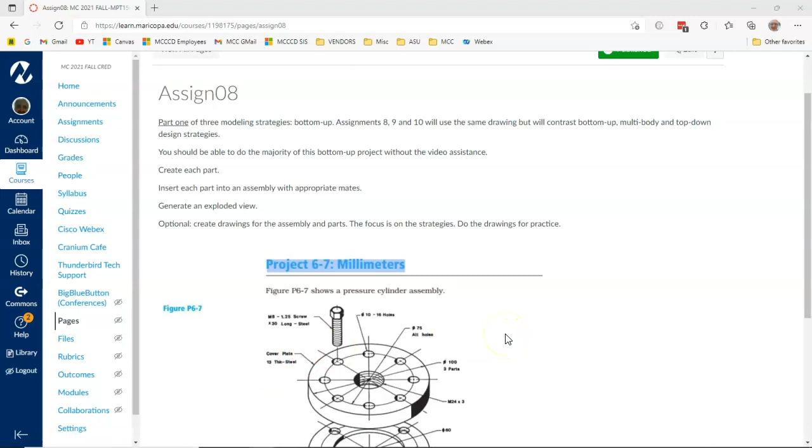Assignment 8 is going to be part 1 of 3 modeling strategies.

We've been doing bottom-up modeling for the first part of the semester, and it consists of creating each part individually, bringing them into assembly, applying the mates, and then creating the exploded view and the drawing. So for this project, we'll be creating each part, inserting the part into the assembly, and then generating an exploded view. The drawings will be optional, but these three are pretty much our standard processes.

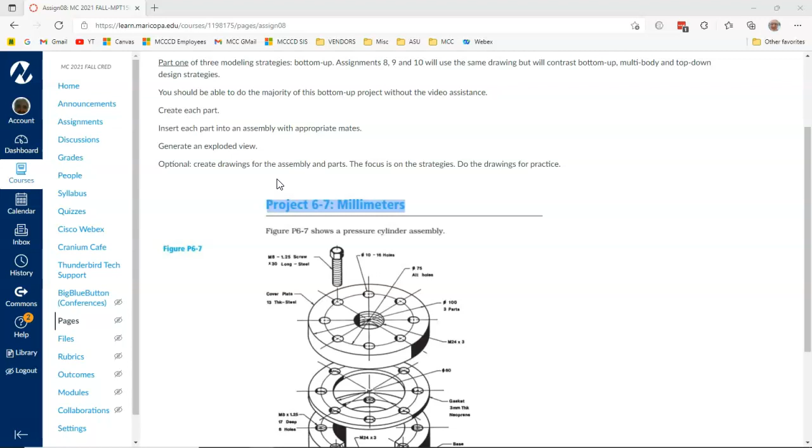So looking at the parts, we can generate a revolve. This will probably be just a regular extrude, and a regular extrude would look at doing the hole wizard for M24, assuming that they're both M24, and looks like they've put in the by 3 this time, so they've given us a pitch, and then the bolts have their designations on them.

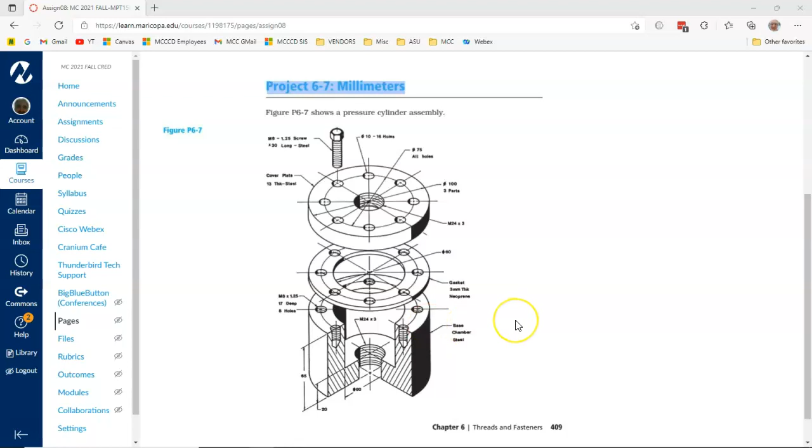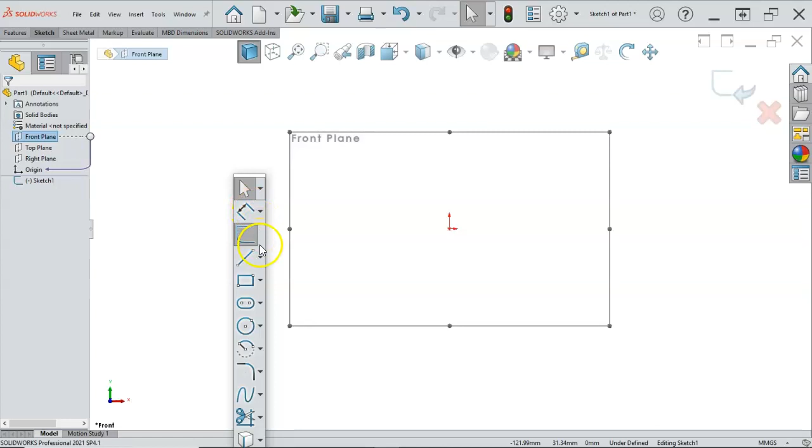So let's go ahead and get started with some revolves. We're still in metric. We're going to build the base. So front plane, sketch, and if we go into the S key, we can do the center line, infinite length, and vertical. I still find it just as easy to hit escape and then L on the keyboard.

Since we're going to generate the M24 with the hole wizard, we'll close this off. If I was going to have that be part of this revolve, I would start off out in space somewhere and leave the hole away from the center line. So our diameter is, as soon as I find it, see the 100 millimeters for the outside, so about 40 to start.

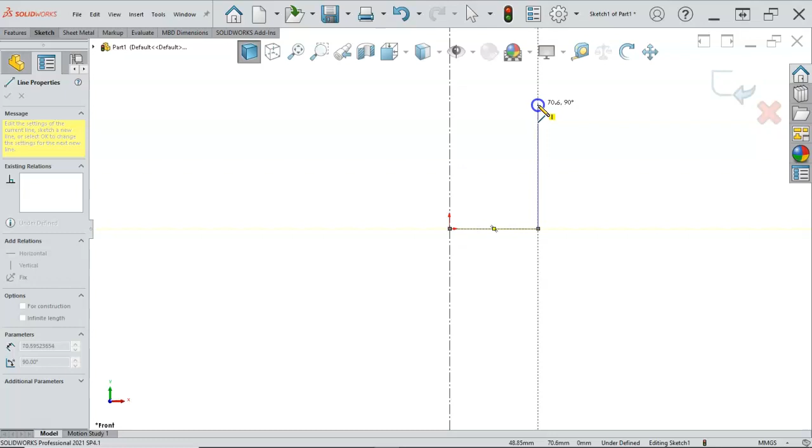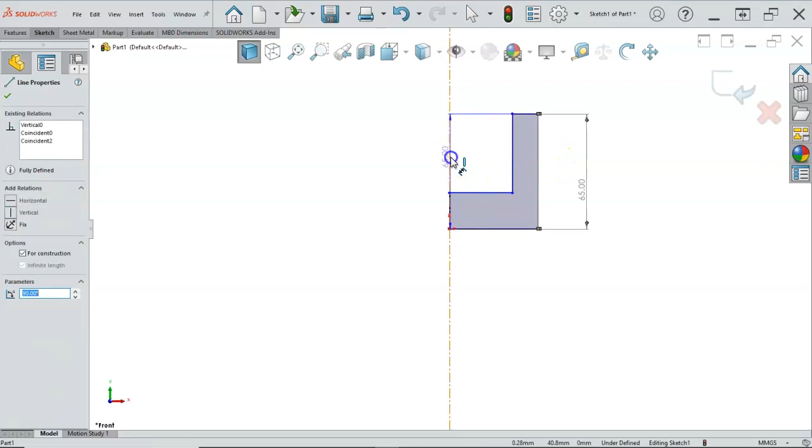Overall height is 65, so we can get close. The wall thickness, back down and around, and close it off. We go into our dimensions, so we have the 65. The diameters then, once I pick the center line, it goes into the diametral, so radial, diametral, radial, diametral. If you pick your object line, you're not going to get the diametral.

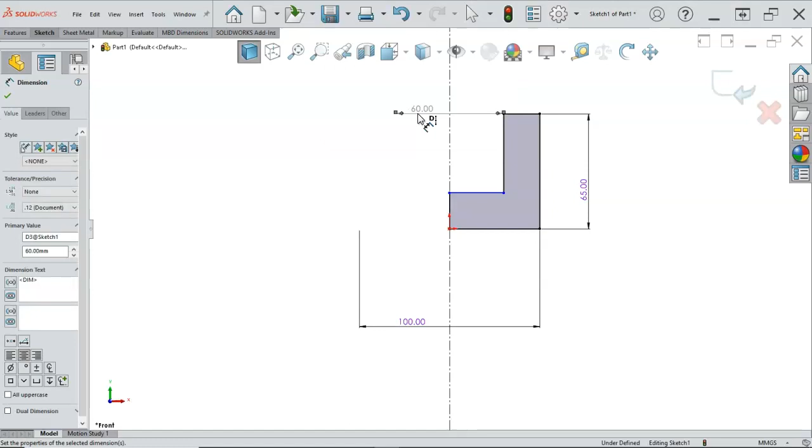So you can put in the radial and keep going with it if you need to. The inside diameter is 60. Since it's in that diametral mode, it will jump into it. And then our thickness is 20 on the bottom. That looks pretty good. We got our geometry in there. So features, revolve, and go ahead and accept.

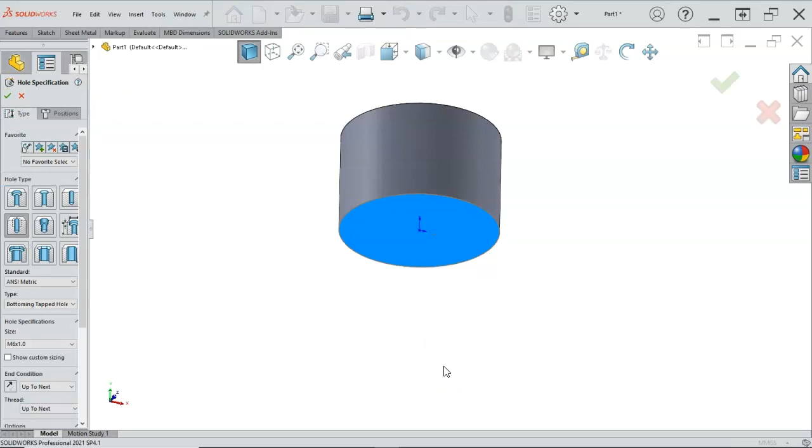And then we have the hole pattern for the M8s and the through hole for the M24. So let's start with that. S key, hole wizard. And if I go to Control 6, or normal to the bottom, that will rotate it around.

ANSI metric. Not really worried about the bottoming tap or tapped hole, haven't seen any major difference anyway. I think more of the blind holes that we'd be concerned with. M24 by 3 on our callout.

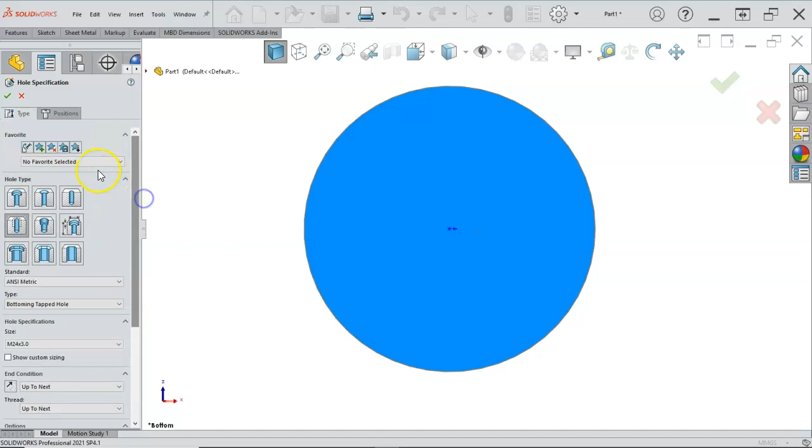So let's see, that was on the top and also in the bottom. So up to next, and if we do a thread class, this is going to the ANSI, but a standard metric would be the G values. So 5 or 6 G in our designation. And then position, we'll put it at the origin. Go ahead and accept. Control 7, go up to the top.

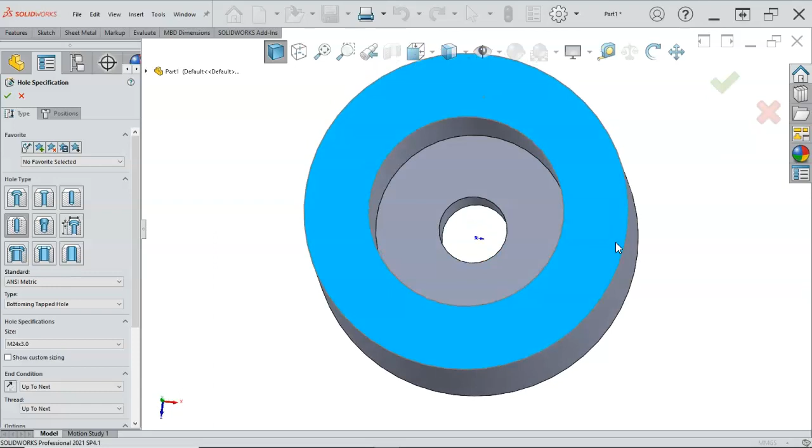And S key again, we're going to do the M8s. I'm set not to rotate to sketch, or it's not doing it with the hole wizard anyway. So I'm hitting Control 5 to generate. And we're looking for an M8 by 1.25.

And our depth will be 17 millimeters deep, so that sounds pretty good. So we need to switch to a blind end condition, and depth of 17. And then we have to decide if we're going to the drill tip or to the shoulder of the drill. So a millimeter is not really that much.

Usually, as a machinist, I'm going to look at that and say I have plenty of material there. I'm going to drill it at least a millimeter or two deeper. So the length of the thread on the bolt they've chosen is 30 millimeters. It has to go through 13, and 3 is 16, and another 16 would put it right at having about 2 millimeters of clearance from the bottom anyway. 17 millimeters being kind of an oddball anyway.

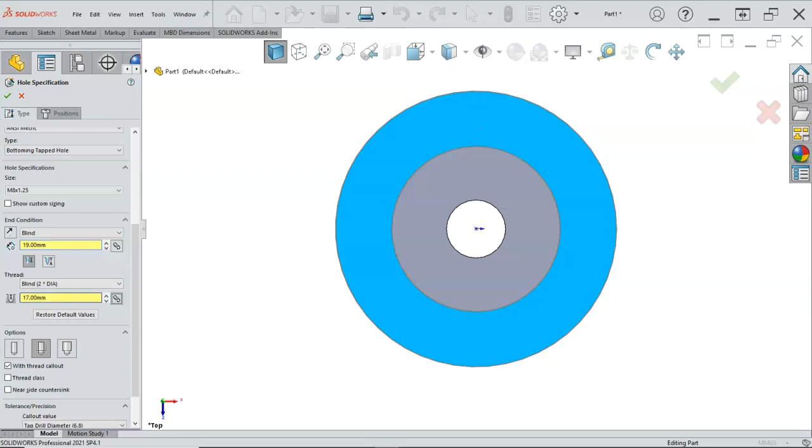If we were going to go to actual thread depth, it just depends on the hole callout, as the hole callout really defines this quite a bit better. So 19 millimeters, 17 millimeters for the thread engagement. Make sure we have plenty.

And positions, we'll rough locate the first. We haven't really had a chance to do too much with our sketch patterns, and for that matter the feature patterns, so we'll take a look at both of those.

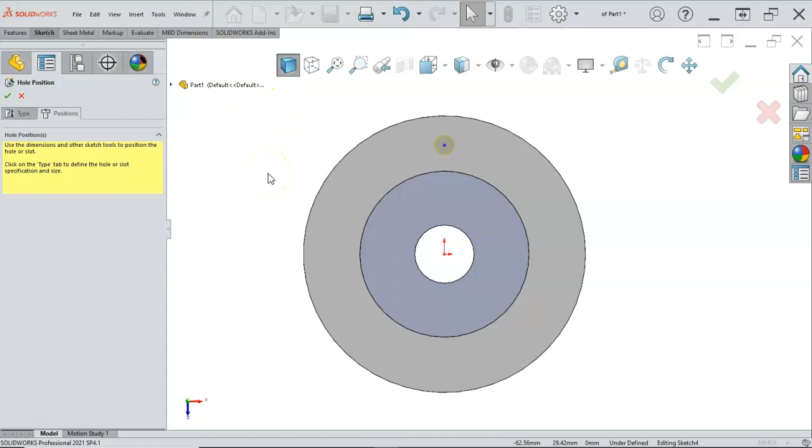The first then is I want a construction circle. So if I do the S key, or in this case the sketch entities, and go to circle, there's no circular center line or anything, so we draw the circle and set it for construction. We'll put our base circle diameter on of 75 millimeters.

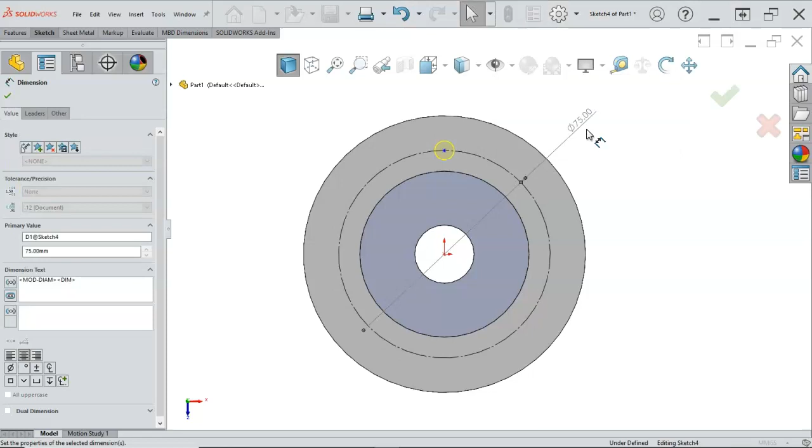I'm going to make sure that I have the orientation set by selecting and control-selecting the vertical to the origin.

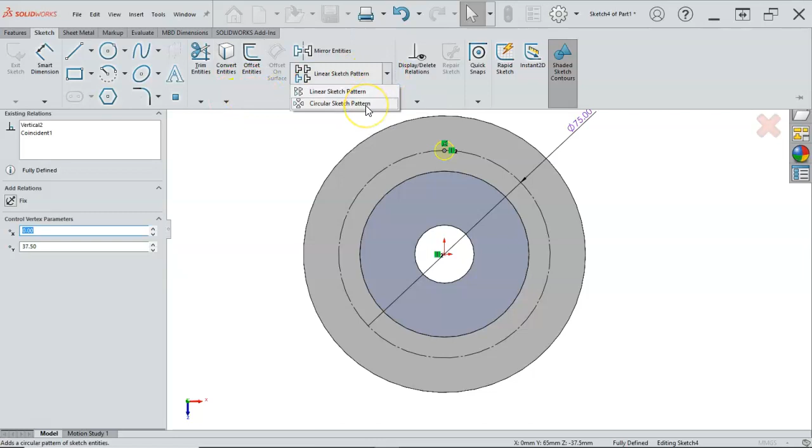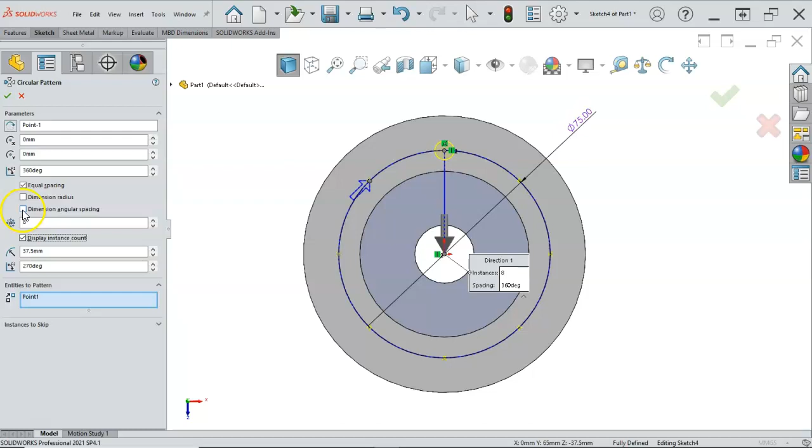When I pick this point and go up to the sketch and pick the linear sketch pattern pull down, circular sketch pattern, we're going to have a total of 7, 8 — so we're going to have 8 equally spaced. We don't need to dimension the radius, but could possibly do the angular spacing. In this case, it's probably easier just to go ahead and accept it.

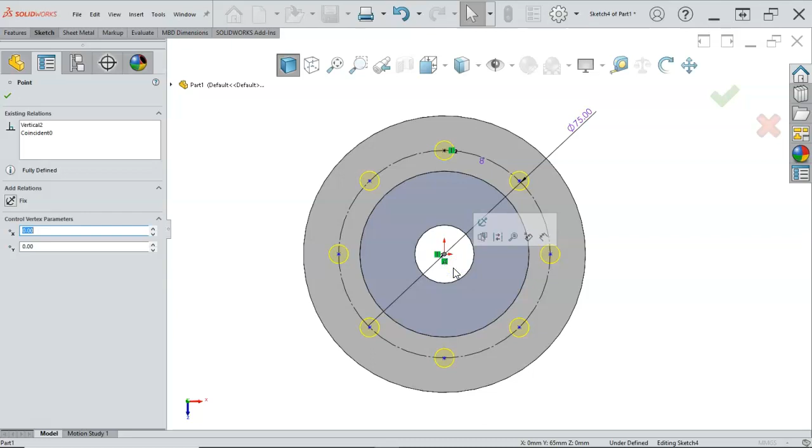Thing to keep in mind, and it's not readily apparent until you get to the drawing, it says there are 9 hole positions. When you do the circular pattern, it puts a point, or at least it used to put a point, at the center, and maybe it doesn't anymore, so we'll have to check it when we get over to the drawing. But if it shows up with 9, it's because there's a point at the center.

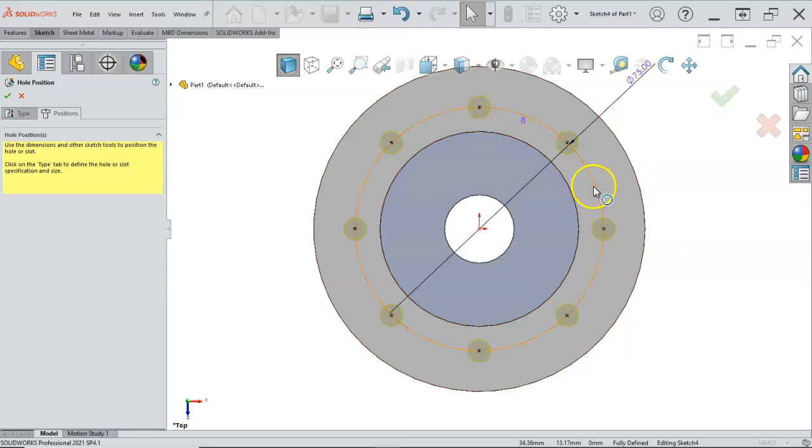Alright, so getting this to go fully defined, if I grab one of the points, drag it away, bring it back, that will usually get it to go fully defined. If it doesn't, grab one more and bring it back until it goes coincident, and allow it to pick up its geometry.

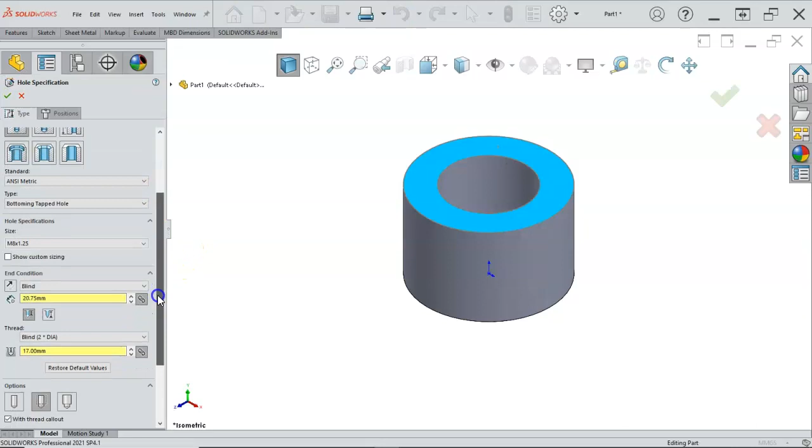Alright, so I mentioned the feature pattern, so I'm going to suppress that out just so that we can review. S key, hole wizard — all of our previous items should stay the same, so it bumped it up a little bit. Alright, I'm okay with that.

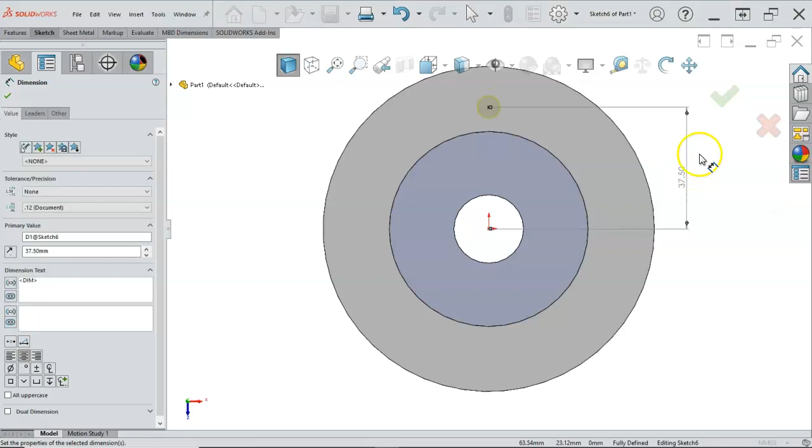Go to positions. If we want to do this without a base circle, then I can set it to vertical. Our radius is 37.5, and accept it.

We need an axis of revolution, so on the feature we go to the circular pattern. If I pick the cylinder — or I can turn on the temporary axes — let's see, where is that? Turn the temporary axes on, then we can pick the temporary axis.

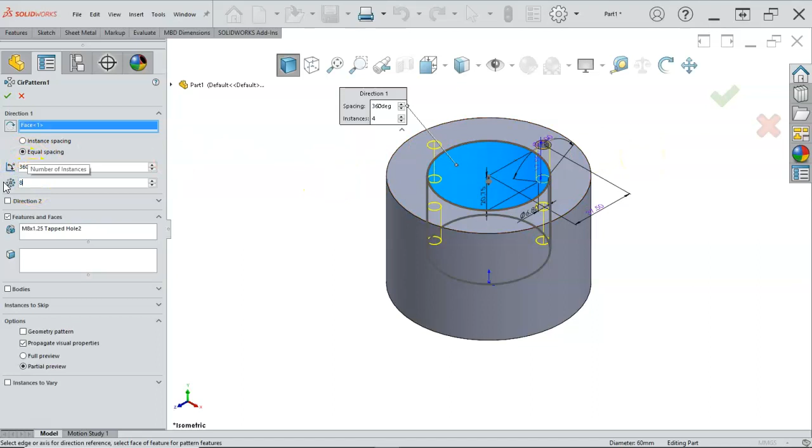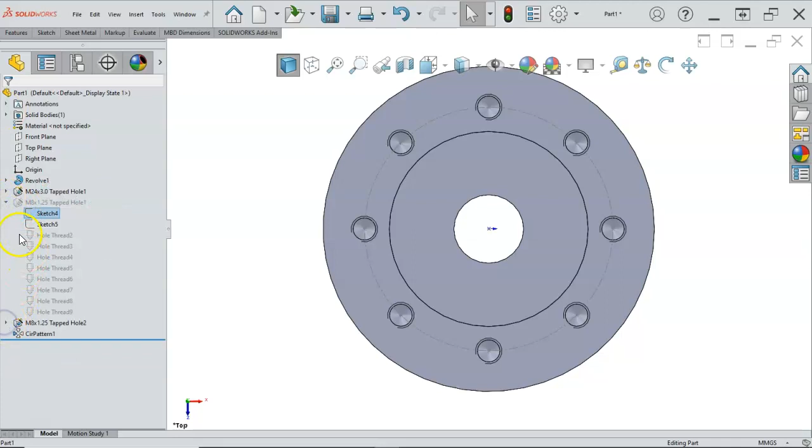And again, there's going to be a total of 8 of those, and the spacing — everything else should look good. So if I do the preview, see if I can highlight — okay, so since I can still highlight even though it's suppressed, I can see that they're pretty much the same thing. You just have to decide which one is a little more convenient for you.

So let's go ahead and save. And I don't think I created my folders for the project, so new folder — assignment 8.

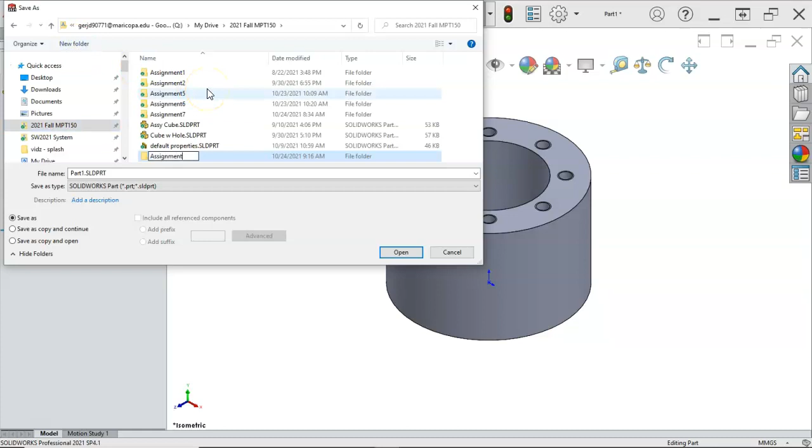And this is going to be the base chamber. And it gives us that it is made out of steel. So we'll go ahead and close that.

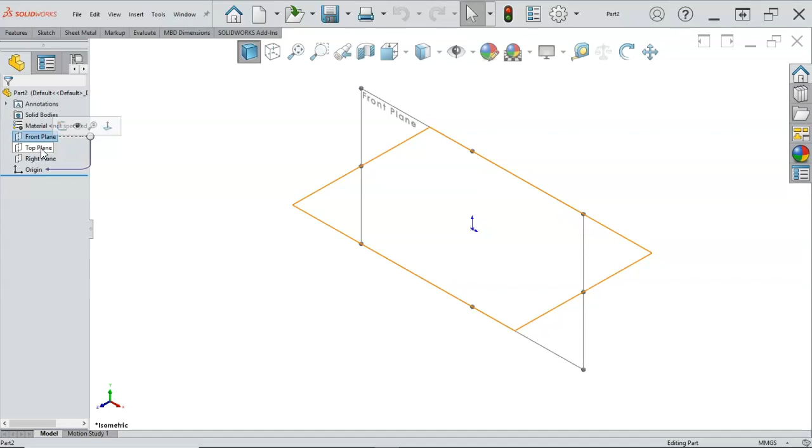So S key and circle, and we bring those back. So we have 60 on the interior and 100 on the exterior.

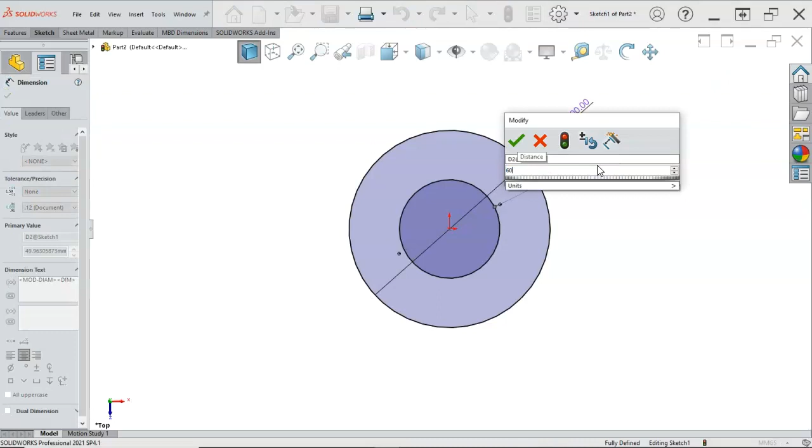And then we have to make the same type of choice if we want to use the hole wizard. The nice thing about the hole wizard going through is it has a little more information on the callout.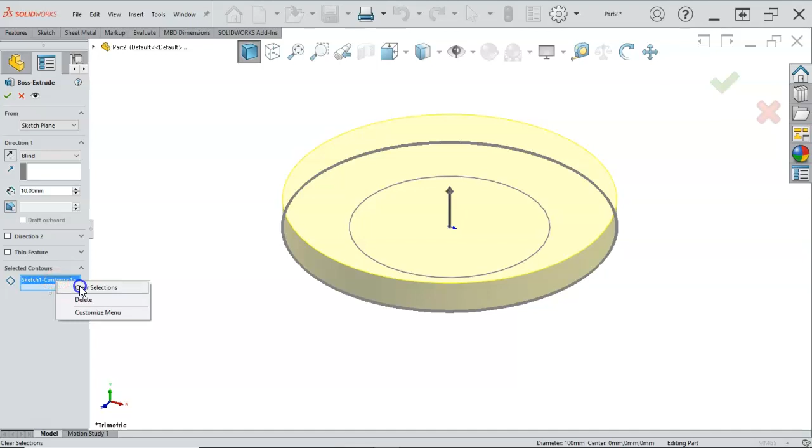Oh, and I jumped out of it, so let's go ahead and use the S key and extrude. And because it thinks that I wanted a body or a contour and region for the body, I will clear out the selected contours. And then this is a 3mm thick gasket. So go ahead and accept.

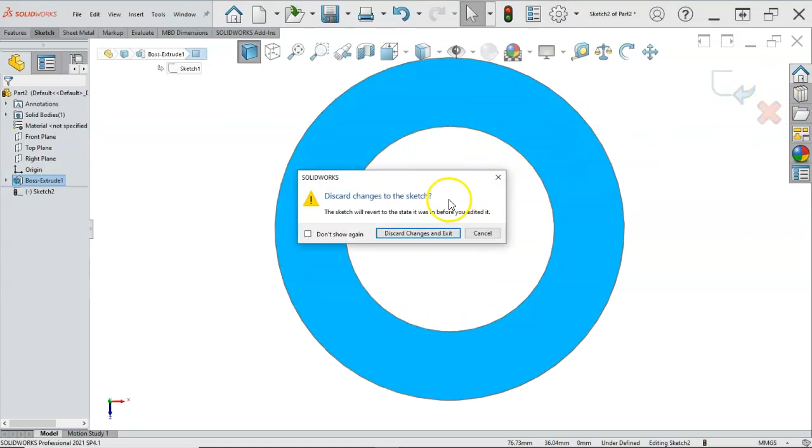Opening up, after I said I wanted to do the hole wizard, select the face so I don't get the 3D sketch. Regular hole. This is an ANSI metric clearance, so we're just going to go to drill sizes.

We're not given, so 10mm for the, actually calls out 10mm for 16 holes, 8 in the cover plate and 8 in the gasket, so we will scroll down to 10.

And for an 8mm bolt, that is plenty of clearance. So the translation at 8mm works out to about 315. A standard clearance hole really wouldn't be more than a millimeter, 354, yeah, 354, 355, whatever it is, would be quite a bit of clearance.

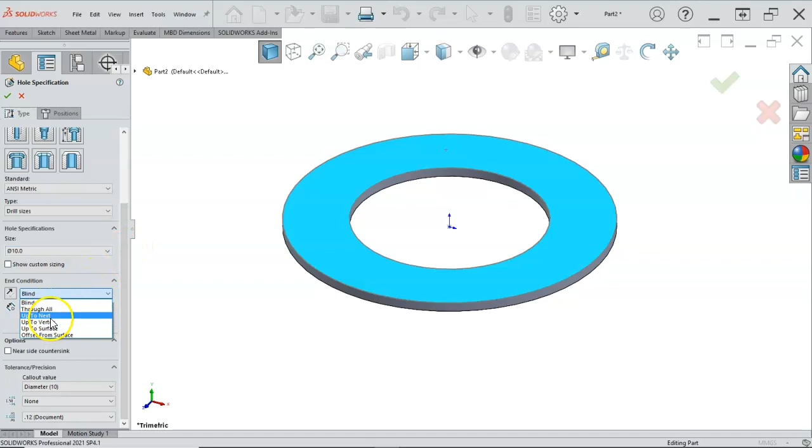Typically 323 to about 330, so 8.1, 8.2 would be plenty of clearance for most positional, and up to next for clearances, position.

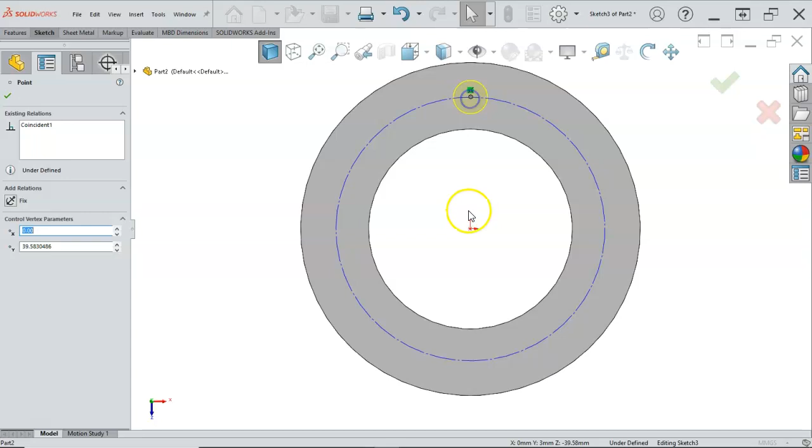I still like the base circle, so S key, circle, bring that out until we find the coincident. Go for construction, right click, select, vertical. We said that that is 75.

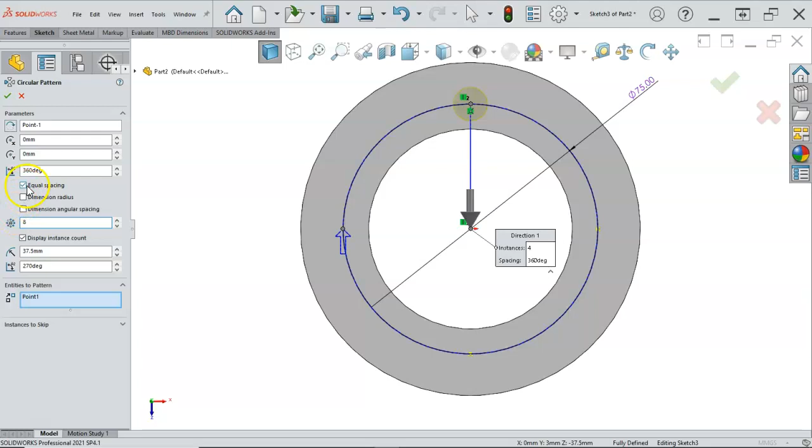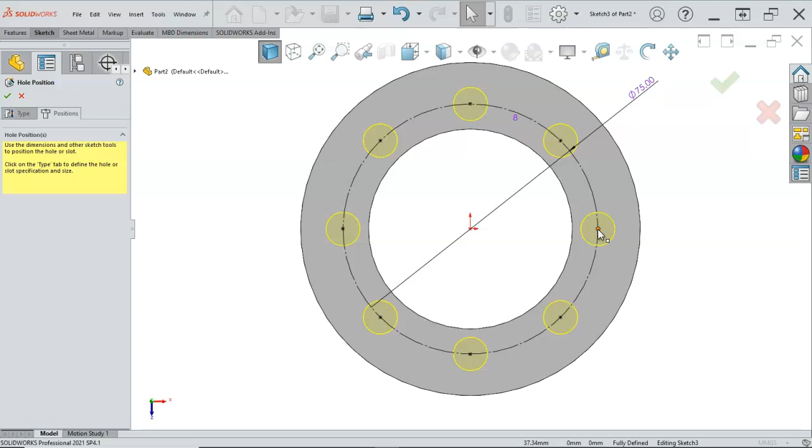Since we're in here, we'll stay with the circular sketch pattern of 8. Tab to look at the preview, and then drag one out and back. Oh, that probably was the reason the other one is I ended up at a quadrant. So if I check that relation on the base, I might see that it inferred another relation.

So this one is going to be our gasket. I'll go ahead and close that.

Now, the other thing that we've done previously, before I closed that, I should have looked at, since the clearance holes are good, that this might be one of those places that I can reuse this geometry and save some time. So save as,

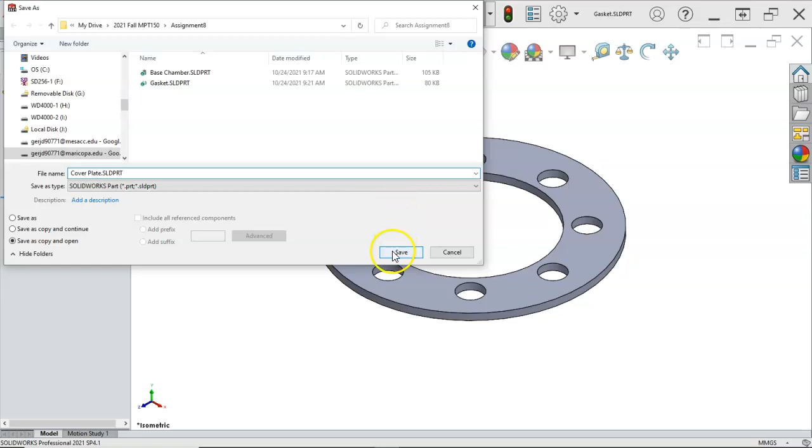Copy and open, and we can change this over to the cover plate. And the reason we want this to open is so that we can immediately start editing it. And if it asks us to keep the original document open or close the original document, doesn't really matter. If I was prepping for the assembly, I'd probably keep it open.

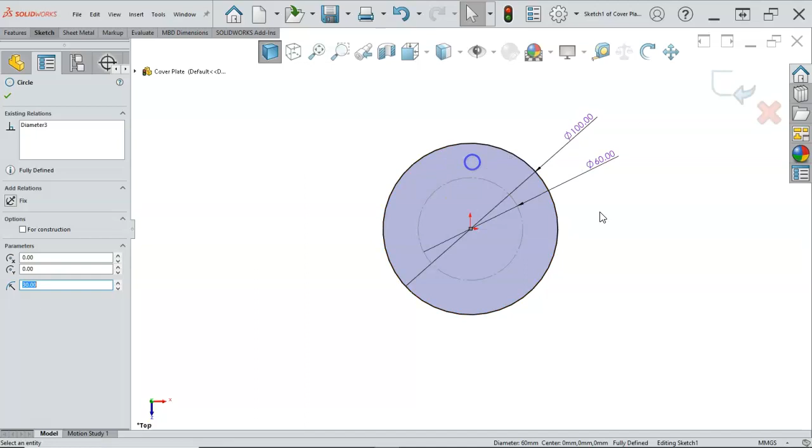All right, so the changes that we want to make is I can leave the 60 millimeters, just change the circle to a construction. Its thickness goes to 13. Double clicking on the part gives me the thickness, and I can change it.

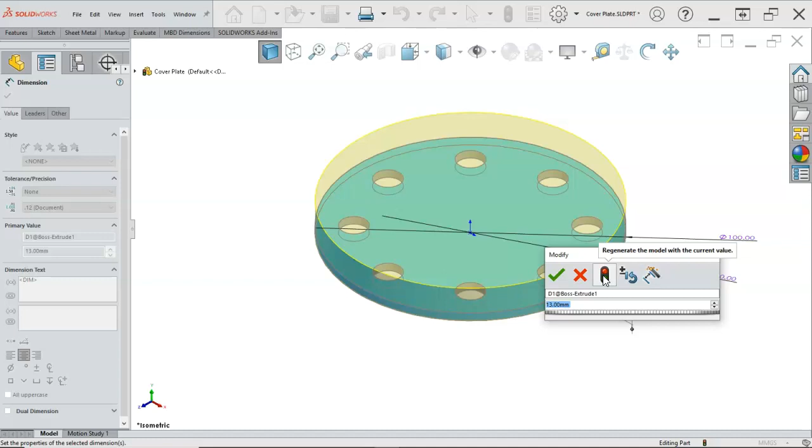And I've never adopted the habit of rebuilding from the modify box, but keep in mind you can regenerate, rebuild from modify. You can come up and rebuild, and you can also hit Control B, Control Q on the keyboard. So then we're to the S key.

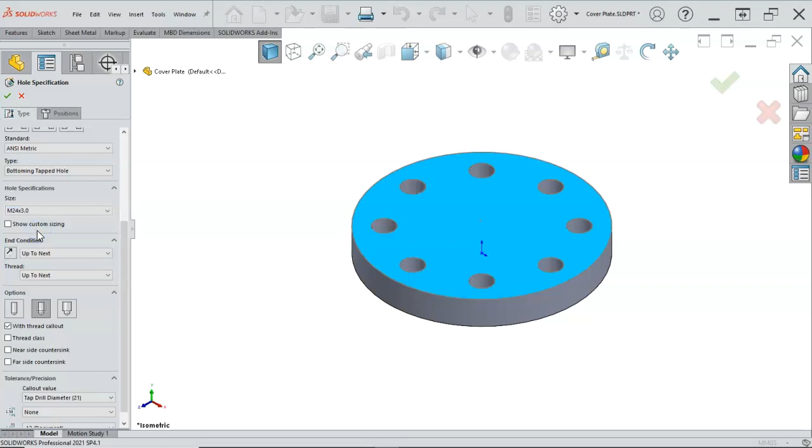The hole wizard goes back to the M24. So we scroll down, maybe not that much. M24 by 3 up to next is fine. No real tolerances. The position goes to the origin. Accept.

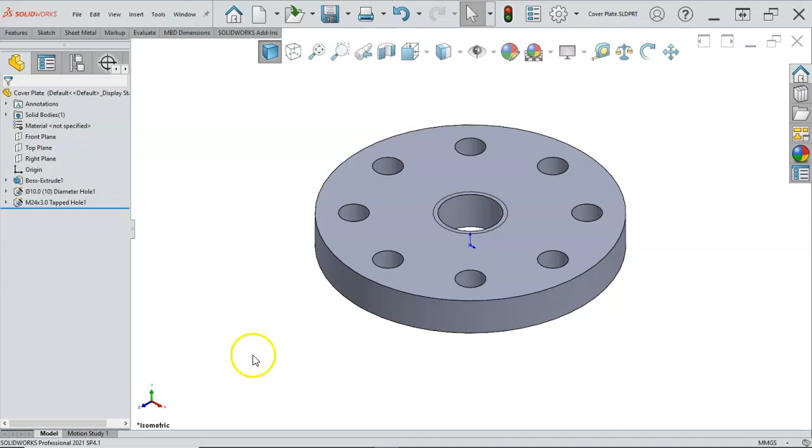And save to the cover plate. Alright, so that gives us our 3 components. The fasteners we will pull out of the toolbox, or we will go to a website like McMaster and download a threaded fastener for our assembly.